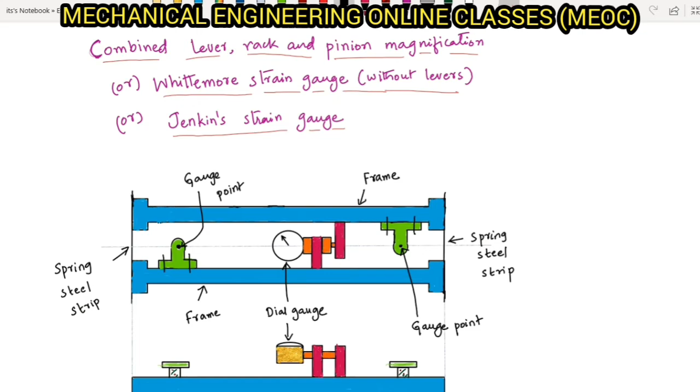Let us now look into the combined lever rack and pinion magnification system, or the Whittemore strain gauge, that is without levers, or the Jenkins strain gauge. The basic elements of this instrument are: it has two frame structures or the frame members shown in blue, a dial gauge. So the top portion of the figure is the top view, and the bottom portion of the figure is the front view.

So there are two frame members and they are in contact with each other with the help of spring steel strips on either side, and there is a gauge point on either side. That is, this is one gauge point and this is another gauge point, and they are conical in nature. If you look at the front view, you will see the conical contact points.

This is called gauge point because both the gauge points are at a distance equal to the gauge length, and they are conical in nature. Hence they are called conical gauge points. These conical gauge points are in contact with the test specimen, which has already been drilled with small holes at these 2 points. These 2 holes will hold the conical gauge points and they are at a distance equal to the gauge length.

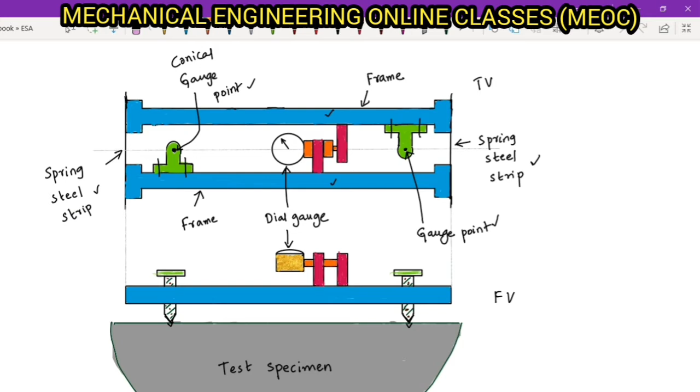Now we have a dial gauge. It is shown in the top view as well as in the front view. This is the dial gauge, and as we can see in the figure, the dial gauge is attached to both frame members. It is attached to one of the frame members here and the other frame member on the other side.

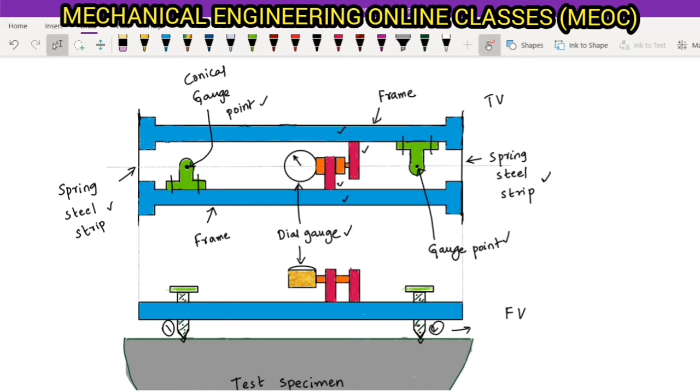So when there is a strain occurring in the test specimen, we will assume that one conical contact point is stationary and the other is moving towards right. Now when this is moving towards right, in the top view, this gauge point is attached to this frame member. So this frame member will move towards right, and as I told you, contact 1, connected to this particular frame member, is fixed. This contact point is not moving.

So there is a relative motion existing between one frame member and the other frame member, and this relative motion is transmitted to the dial gauge because of these contact members. These are the two contact members attached to two frame members, and these two contacts are connected to the dial gauge. So when there is a relative motion between the two frame members, it is transmitted to the dial gauge, thus changing the position of the pointer on the dial.

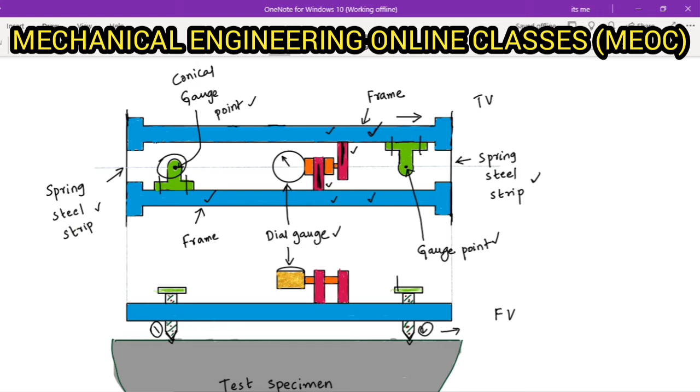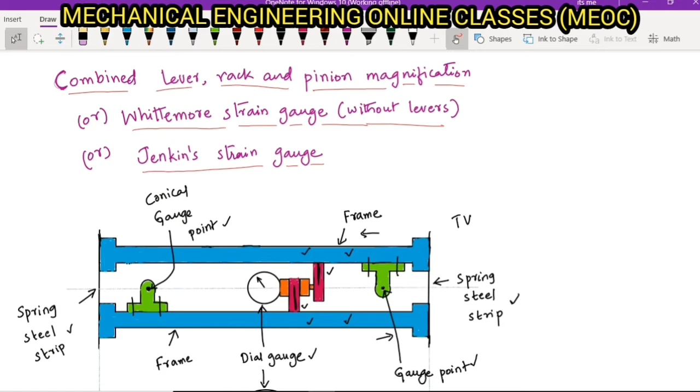We will see why this is called combined lever rack and pinion magnification. It is because the two frame members act as levers in transmitting the motion, and, as we have already discussed in the previous videos, the dial gauge consists of rack and pinion mechanisms. Hence this Whittemore strain gauge comes under the combined lever rack and pinion magnification system. It has two frame members which act as levers, and the rack and pinion mechanism is contained in the dial gauge.

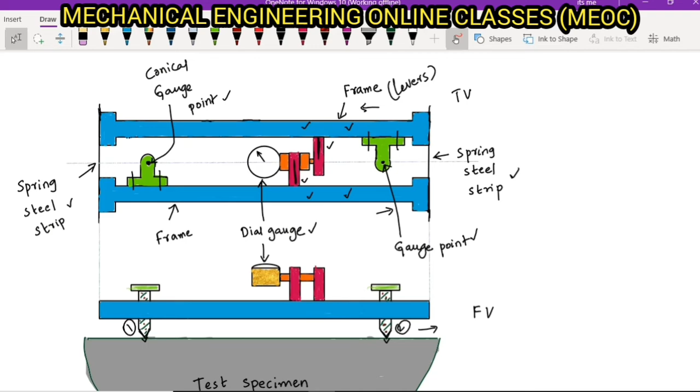Let us now remember a few important points of this strain gauge. The very first point is the angle of contact point is 45 degrees. Second point: it is normally made with a 50 mm or 100 mm or 150 mm gauge length.

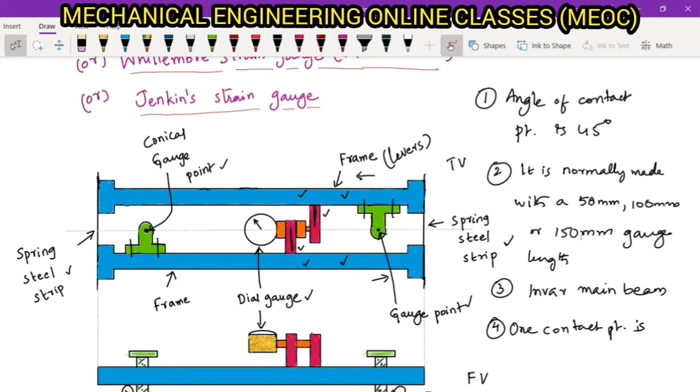The frame or the main member is made of Invar. The main beam is of Invar material. It has an Invar main beam with two conical gauge points. One contact point is fixed and the other is movable. Coming to the next important point, the dial gauge is a 0.0025 mm dial gauge.

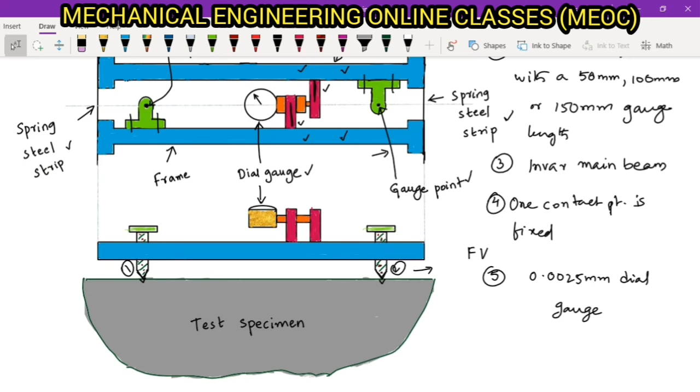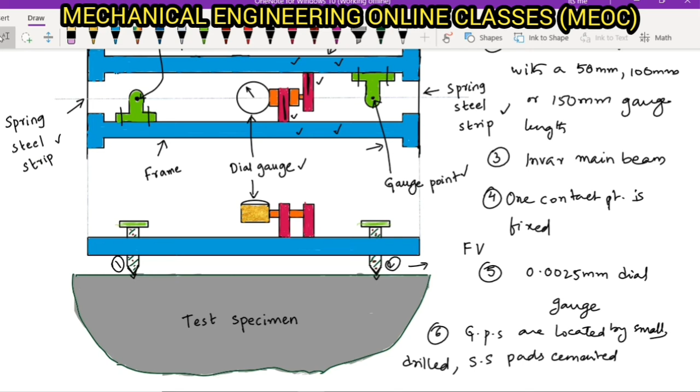The gauge points are located by small drilled stainless steel pads cemented to the structure. And this strain gauge has an accuracy of plus or minus 3 into 10 power minus 6.

And the gauge length is approximately 250 mm. It is mainly used for measuring strains on concrete members, with a gauge length of 250 mm.